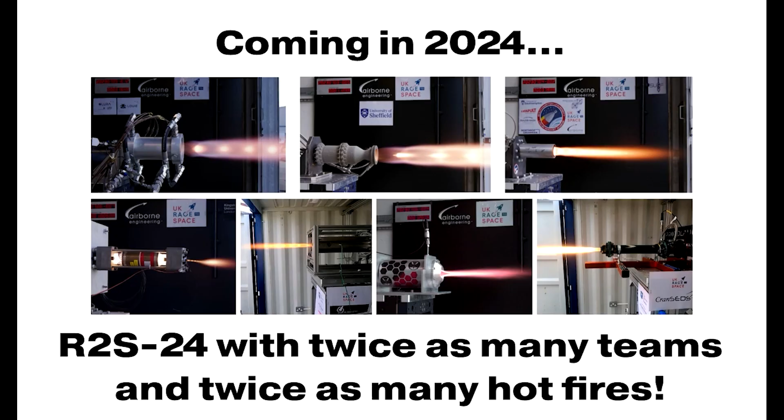Okay, brilliant, thanks. Yep. So in 2024, which is obviously now,

So in 2024, which is now, we've got 19 different UK universities all building and developing liquid or hybrid rocket engines, and they'll all be kind of celebrating that at the end of this week. But get in touch if you want any more information on that. There's a website link there.

Thank you. Very good. And as it says, there's nothing else like it in the world. Is that right, to your knowledge?

Yeah, I think so. In the US, it's a lot easier to test stuff yourselves, but there's no organized propulsion competition. There's obviously Spaceport America Cup, where you launch all sorts of things, and people can go to FAR in California. But it's quite difficult for students to get access to static hot fire testing. The German teams can do it at DLR, but in the UK, there's only really one place to do it, and we're starting to grow that.

So yeah. Fantastic, Alistair, it's brilliant. Okay, so carrying on, the point of today is to look at the tool that RocketPy uses for 3D trajectory, which is a tool that isn't used in other software packages. However, it does require Python skills.

So we're here today to show you the approach to using RocketPy, and just to give you an introduction, especially for people that don't code in Python, so that you can understand, because it's coded in Python, you can do other things with it.

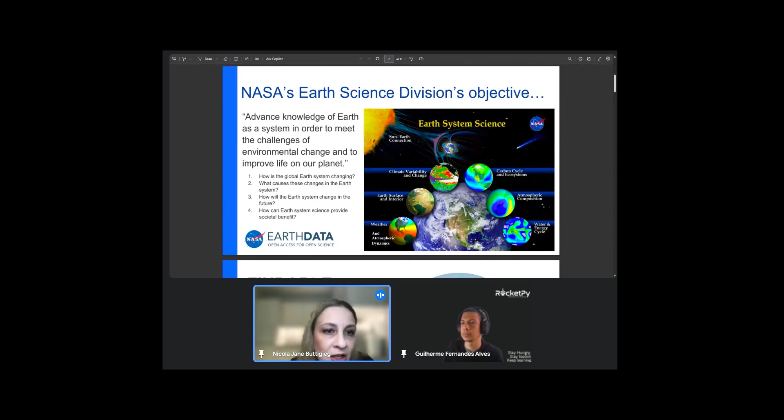Now, Gui, if you can just scroll through the slides very quickly, I won't spend too long on it. These are links and just some information. So we have a partnership with NASA Earth Science Data Systems who are involved with the Quantum Project. And I've been telling them all about my conversations with Gui and Alistair up at the University of Sheffield. I've put some links in there. These are all the tools that you can use to download all different kinds of data that could impact a rocket launch.

And they do actually offer free outreach to help you learn how to use those. And it's open internationally. And I know so because I've been using it with my space tech diploma for the last few years. And I have a whole network of team members there.

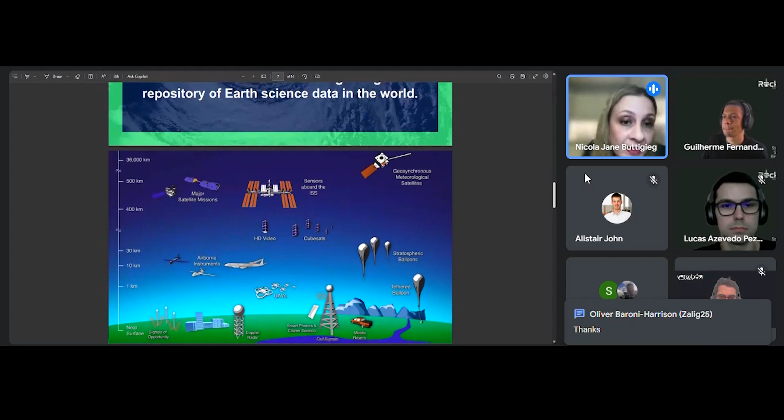And just to finish off before I hand over to Gui, when I go to King's College London next year, I will be doing that PhD in aerospace, upskilling in Python using generative AI. So my relationship with NASA will continue, and with Gui it will certainly continue. I hope with Dr. Alistair John it will also continue. But we are working towards upskilling using AI and using all these possibilities for learning on the job while you're trying to build your rockets, because this is the way of the future.

Talking about some other key features, we have Google Earth integration, and you can see your rocket trajectory in a 3D Google Earth map. That's a very cool feature.

We also can do environmental analysis with statistical data. That's very good if you are simulating a rocket throughout various conditions and deciding the ideal time of year to launch a rocket, or comparing this time of year with previous years.

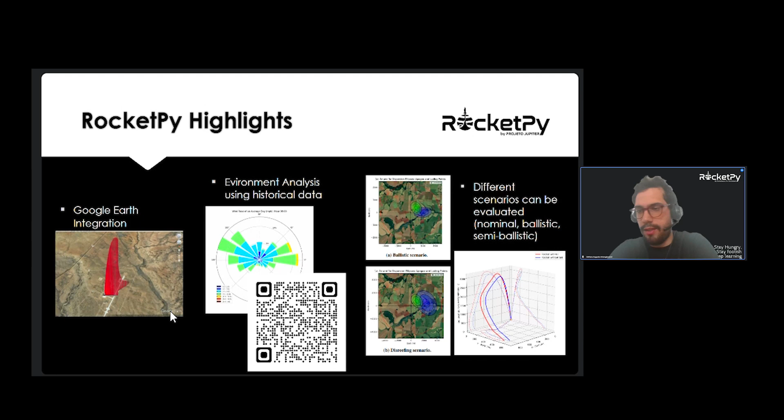And we also can simulate different scenarios. The main scenario is the nominal flight that everyone hopes to have, but we also can simulate a ballistic and semi-ballistic flight, and everything in the range from normal to ballistic flights.

Because of all this reliability and these features, we have become the official simulator of the EUROC competition. The European Rocket Challenge that happens yearly in Portugal has chosen RocketPy to be its official simulator.

Every team that participates in this event has to simulate their rockets using RocketPy, and the competition itself uses RocketPy to optimize their operations and for safety reasons, like evacuating areas that might have rockets falling down.

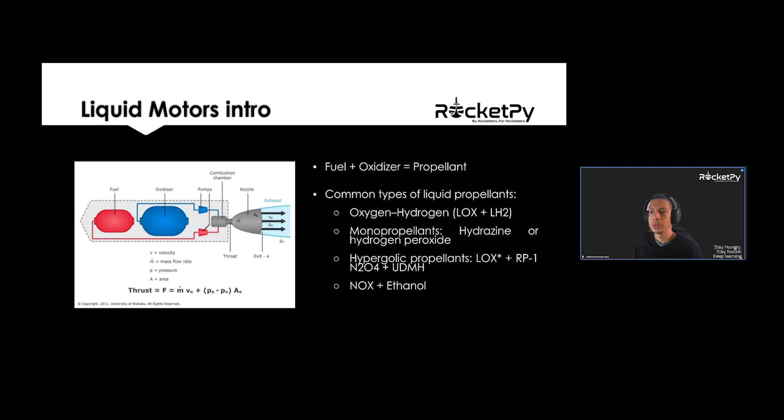And to better illustrate this, I have an animation that I got from a YouTube channel called Learn from the Base. I love this channel, and here you can see the basic principle of this kind of motor.

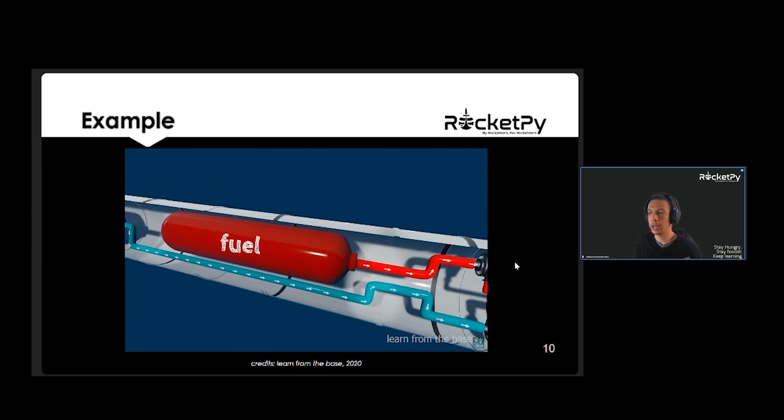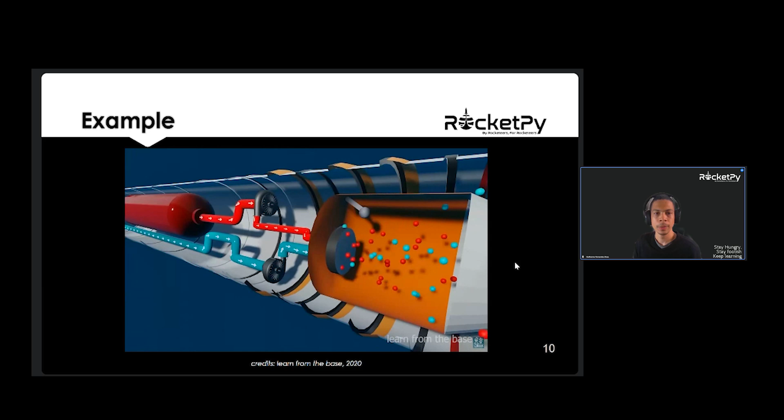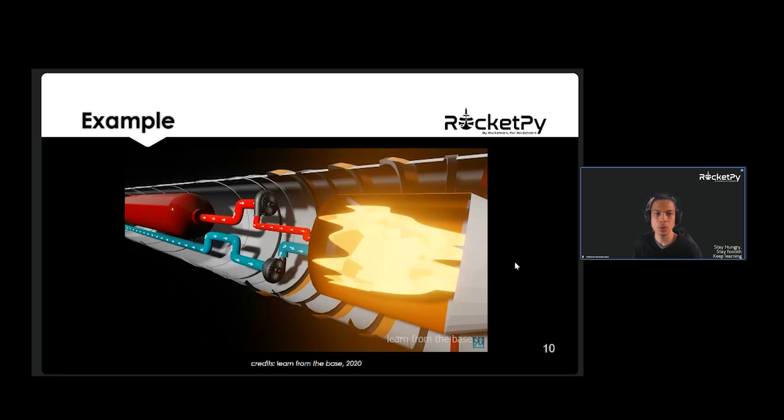Both fuel and oxidizer are being injected into the combustion chamber by the use of different pumps, and once they are being fed into the combustion chamber, they start being mixed. During this mix we start an ignition, and this ignition will be responsible for starting the motor indeed. So when we start the ignition, we create a combustion, and the reaction will happen, and this combustion is responsible for creating the thrust force that will make the rocket fly away.

This is basically the behavior of a liquid motor, and this can also be found in the literature as a bi-liquid propellant motor because it uses two different liquids to make it happen.

To model this on RocketPy, what you're going to do is make a simplified representation of this motor, and in order to do so, we are going to require some different inputs.

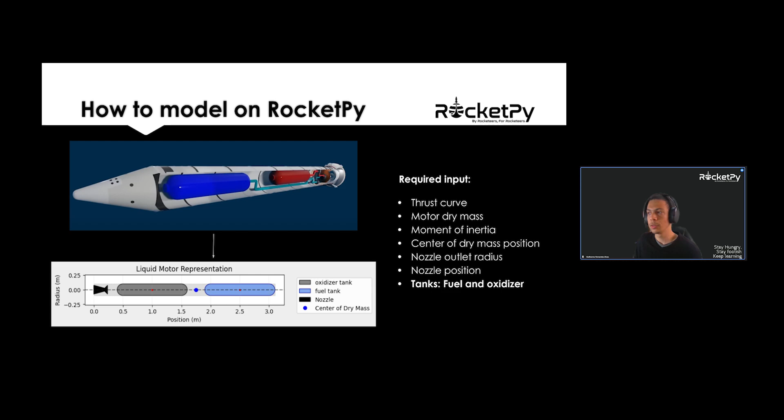First of all, the user must provide a thrust curve, which is usually already taken from either an empirical test or a simulation in another software. But you also need geometric properties, such as the motor dry mass, the moment of inertia of this motor, the center of mass of this motor, as well as the nozzle outlet radius and position.

And of course, we need to model the tanks here. The tanks will be the most crucial part of our design, and in our case, we're going to divide in our example here an oxidizer tank and a fuel tank.

There are different ways of defining these things on RocketPy. To be more specific, there are 4 different ways to define them. I will briefly explain all 4, but in our example we are going to use only one of these. The first one is a mass flow rate based tank, which is used when you already have collected a mass flow rate evolution curve.

So imagine you have performed a static hot fire test, and you probably already measured some of these measures, and you can start a mass flow rate based tank based on this curve from the mass flow rate.

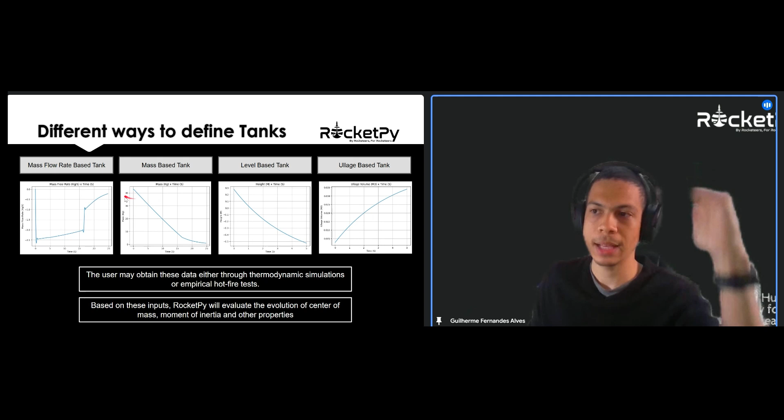The second option is when you know the evolution of the mass of liquid and gas throughout the time.

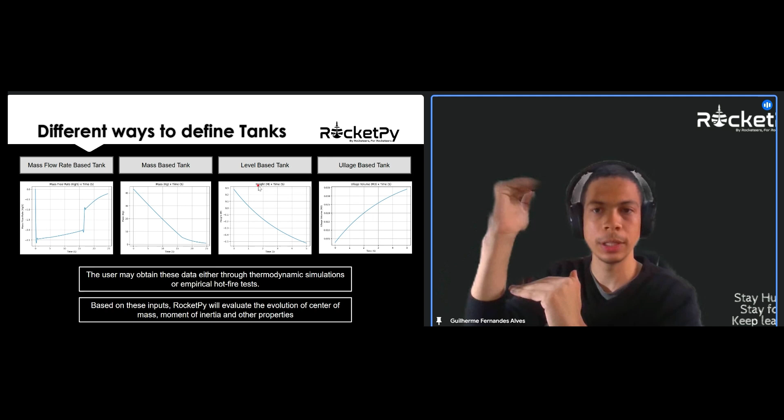The third one is when you have defined or determined the level, which means the height of the liquid inside the tank. Imagine the tank is vertical, and as the combustion happens, the liquid height always decreases.

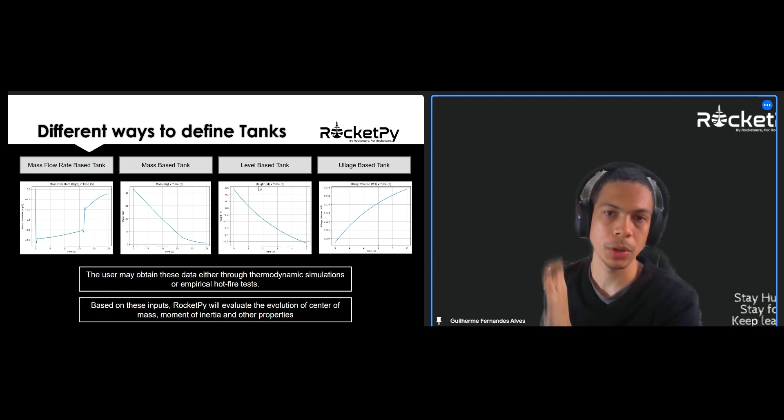And the final option is the ullage based. Ullage is the volume of the tank that is not being occupied by the propellant, by either the fuel or the oxidizer. So imagine this empty volume, and as the combustion happens, this volume tends to increase over time.

This kind of data may be obtained either by some thermodynamic simulations that can be done in other software, or even through empirical hot fire tests. RocketPy supports both different options of inputting data.

And what we're going to do is, based on these inputs, RocketPy will evaluate the evolution of the center of mass of the motor, which may contribute to the rocket trajectory, as well as other important properties such as the exhaust velocity or the moment of inertia.

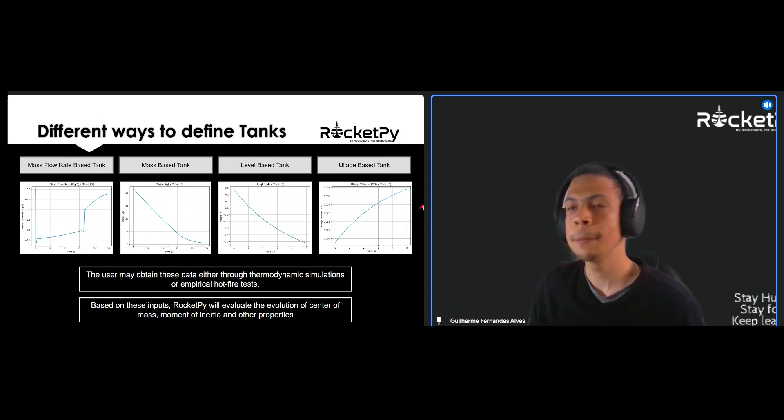And this is the part of tanks, and this is the part of liquid motors. But what else do you need in order to make a RocketPy simulation?

So simulating a rocket on RocketPy is as simple as this flowchart. We just need to firstly define a motor object that will be applied to a rocket object, and we call this the physical containers, the physical attributes.

They are responsible for saving and storing physical data of the rocket. We combine these along with the environment, which is responsible for containing the data from atmospheric models, and those three different components altogether represent the initialization data.

With this data, we instantiate a flight class, and with this flight class, we finally simulate the trajectory and visualize the results. Okay, and right now I will start the demonstration.

We have this Jupyter Notebook, which is an environment where we can run RocketPy in Python. I will be sharing my screen, but just so you know, all this content will be available after the presentation. Okay, so here we have the example.

I'm running this on Google Colaboratory, which is a free open source tool from Google that allows us to run Python, and in running Python, we are going to make our RocketPy simulation.

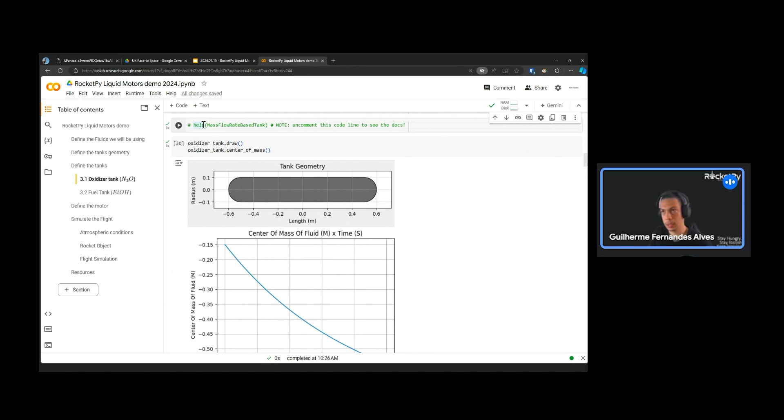Just as a comment here, in case you need to understand the meaning of any of these variables, you can at any time run something like Python help with the name of the class, so you can access the entire documentation of that class, which lets you understand the meaning of each argument and also understand all the available methods and functions within that class.

Here you can see the tank geometry in coordinates. It's a 1.2 meter length tank, and as I said, they are rounded with spherical caps at the tips.

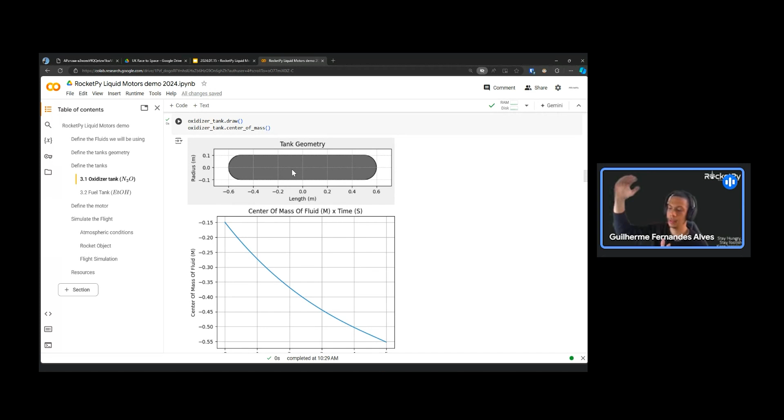We can already anticipate how the center of mass of this fluid will behave during the simulation. It starts at some point near minus 0.15, and as time goes on it starts decreasing up until minus 0.55. Imagine you have this tank and you rotate it clockwise, imagining the liquid starts at the full tank - the center of mass is near the center, and as the volume decreases during combustion, the center of mass keeps decreasing until the end, where we see the tank totally empty.

For the fuel tank, we are doing pretty much the same thing with just one adjustment: I want to show you that we can pass a function for the liquid mass flow rate and another function for the gas mass flow rate.

Once again, these are just examples, so I'm defining these as functions, but you can imagine that if you already have empirical data, you could easily load a CSV table describing the time and the mass flow rate at that specific time, and RocketPy would be able to use that as input.

We run a similar procedure, so here we have the geometry of this fuel tank, and we can already anticipate the center of mass of this fluid. Later on, we can finally define the motor, which will be composed of the two tanks we have performed before, along with some other data.

One important aspect of the definition of the motor is to define the thrust curve. Once again, I use a Python function to do this. So here I have, as a function of time, this expression that describes or illustrates the thrust curve. But once again, you could easily import this from a CSV file, for example, in the case where you already

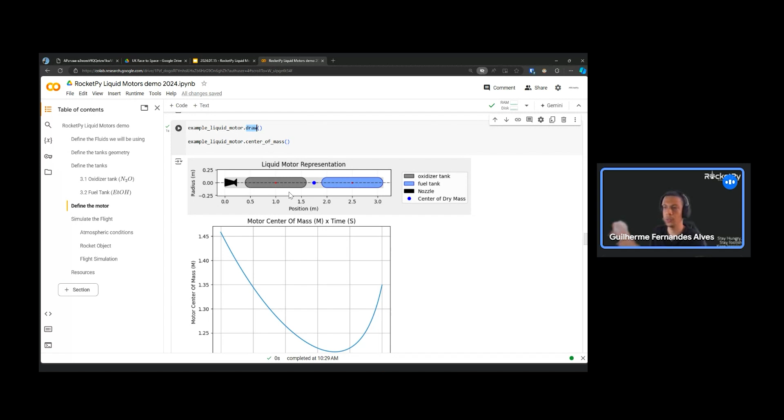Here we can see what RocketPy calculated as the motor center of mass. So once again, if you take a look at this coordinate system where 0 is here and 3 meters on the right, we can see that the center of mass starts at some point around 1.45. So it should be here at the beginning of the flight. And the center of mass starts decreasing up until a minimum point, and it starts increasing again.

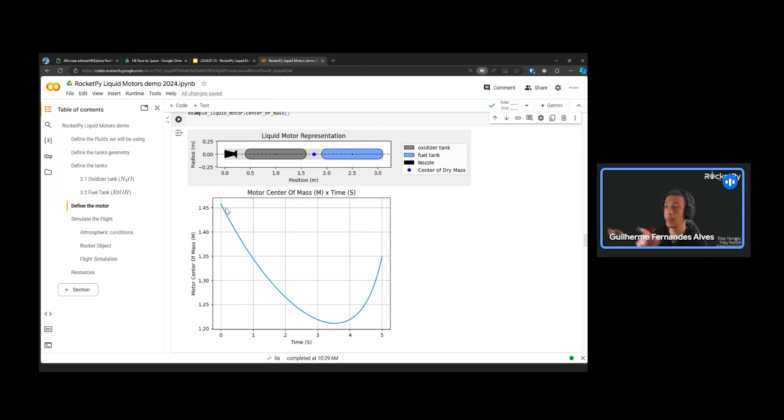So the center of mass does something like it moves to the left and then moves back to the right at the end. This is a behavior really hard to predict when you are defining the tanks, but RocketPy is already able to compute this and give you the center of mass evolution. This is of key importance for flight simulation because the center of mass of this liquid motor may impact the trajectory simulation behavior.

Okay, after defining the motor, we can finally simulate the flight. So I'll be defining an environment. This is just a simple environment. I have picked randomly some latitude and longitude. I will be defining a constant wind, even though you can connect RocketPy

Finally, we can instantiate a flight class. We basically tell where we are heading the rocket at the beginning and what's the inclination or elevation of this launch. And running this simulation is pretty simple. It takes up to 1 second, sometimes even less. And after running the simulation, we can finally see the results.

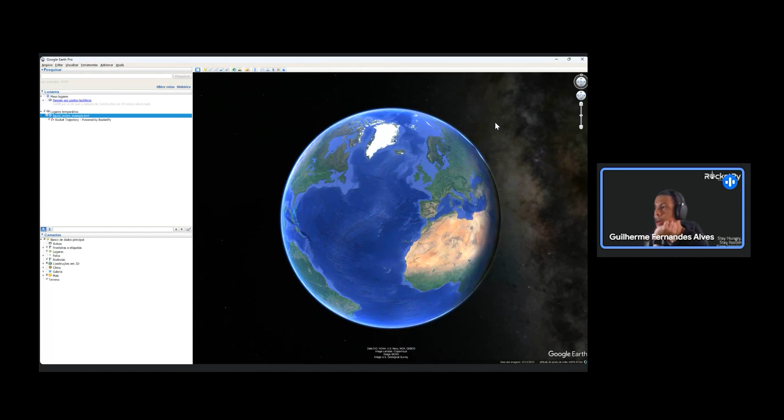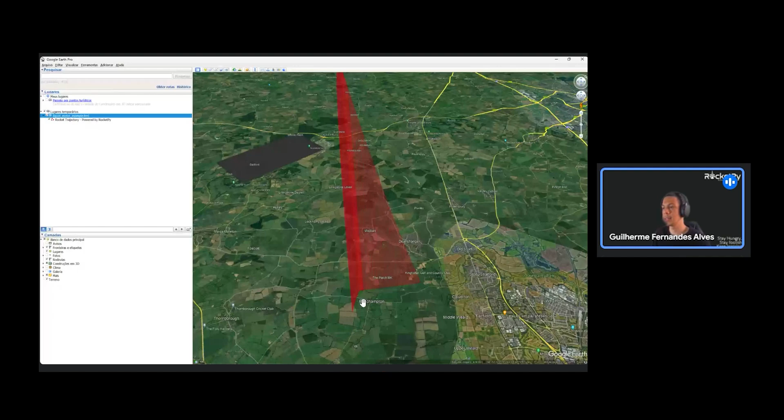Once this is downloaded, I can open this automatically on Google Earth. And so let's see where RocketPy is sending us on the Earth. It's right in the middle of England. As I said, it's a random location. I don't know if any of you know this place, but this is a 3D trajectory. So the rocket starts flying from this point, and you can analyze the trajectory directly on Google Earth.

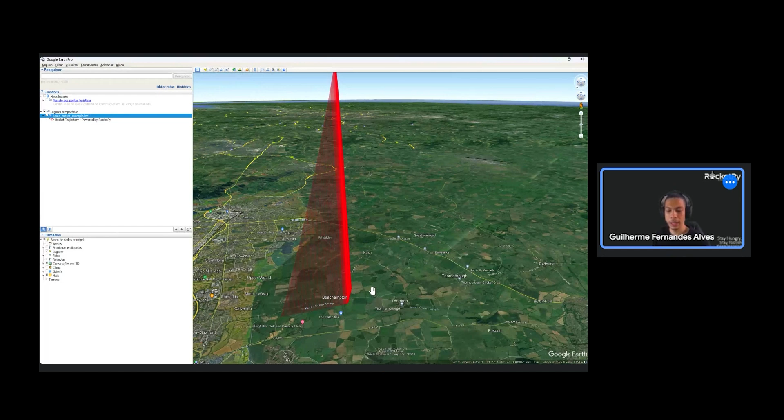And well, this is pretty much the basic we can do with RocketPy. You can go even beyond that. You can perform even more accurate simulations with it. We are using an example motor, so it doesn't really exist. But if you want to see a real liquid propellant motor being simulated with RocketPy, I recommend you take a look at our documentation.

At our documentation, we have an example from the Space Enterprise at Berkeley. It's a rocket design team from the University of California at Berkeley. They were pretty much the first team to use RocketPy simulations to simulate their liquid motors.

I also have added some other resources here in case you want to go further, but the main resource you could find is searching for docs.rocketpy.org, and you're going to see our documentation. We have a daily effort of keeping this documentation updated. You can easily go into the beginner's guide, or if you are already experienced with Python and programming, you can go directly to other different pages.